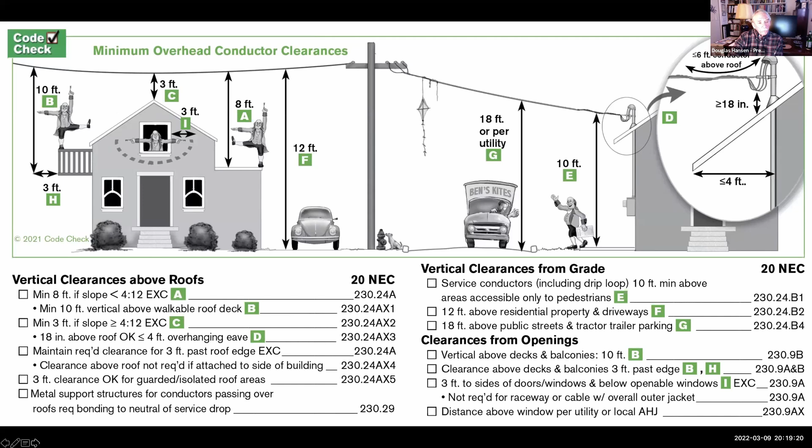But we find this as a good guideline nonetheless for certain things that affect safety and are common sense in a way, especially this one on the left about the distance to an openable window. We don't want somebody being able to reach outside their window and use the electrical service wires as a clothesline.

So here's an example from a house that, gosh, I think I probably looked at this 40 years ago. You can see what happened here is someone built an addition on the back, right underneath the existing service drop. So what you have is something that's a potential hazard to people working on that roof, or even a firefighter walking across it. It's just an example where I'd use the illustration and point out that that's not allowed to be so low over that roof.

Basically, the rule for clearance in front of a piece of electrical equipment that might require servicing is, can I put a refrigerator in that space? That is a space that's 30 inches wide and 3 feet deep. This box does not necessarily have to be centered in front of that panel, but it has to have those dimensions - at least 30 inches of width and 3 feet of depth.

And for the last 30 years, the codes have also said that working space extends all the way to the floor. Didn't used to. It used to be that you could have some permanent piece of equipment like a clothes washer even in front of it, but not anymore.

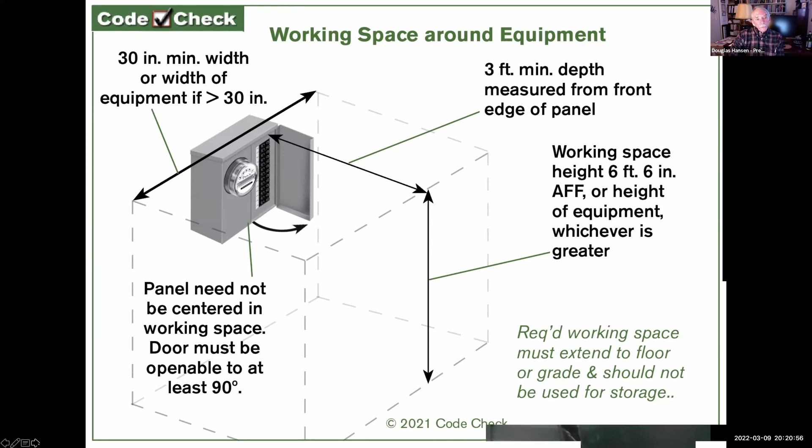There's a requirement, and a lot of confusion too about how to do this right, for feeders that supply separate detached buildings. Today we basically always provide a 4-conductor feeder and treat this like a sub-panel, meaning we don't bond the neutral - we have a separate equipment ground and a separate neutral. But the difference is that whenever it's more than one circuit in this separate structure, it requires its own grounding electrode system. That grounding electrode system is there for the same reasons we have one at our house, which is primarily to prevent voltage gradients from affecting our systems.

It's to protect us from lightning. It has nothing to do with helping our circuit breakers protect us when there's too much current going through the circuit. That is not the purpose of having a connection to the earth. The circuit breakers don't care about the small amount of current that could actually be traveling through the earth compared to the large amount of current that could be carried on an equipment ground.

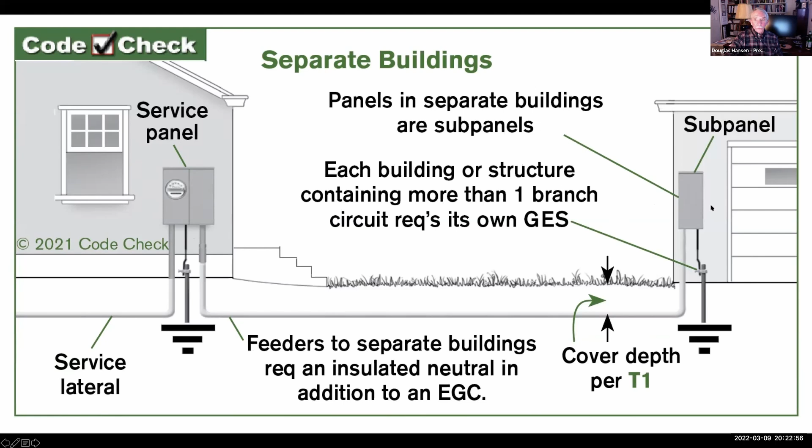So this has caused a lot of confusion to people. What happens is people think, well, all I have to do is connect to a ground rod at my second building, and I don't need to have the equipment grounding conductor in the feeder. Well, yes, you do. And you keep your neutral free of it.

So here's an example - I see this wrong a lot. I just did a report, matter of fact, on a $5 million new construction where the main service came into the garage, and the main house had 2 sub panels, neither of which had any kind of apparent separate grounding system.

There's one question here from the great state of Florida. Mr. Larry Serra wants to know if sub-panel clearances take into consideration a garage where the car would be parked.

There isn't anything, as far as I know, in terms of a concern, unless the vehicle could hit the sub panel, in which case it would require some kind of a barrier. But no, you can move the car, you can move anything that you've set in front of it. It's only things that are permanently a part of the structure, such as a workbench in front of the panel, that would restrict the clear space to the floor.

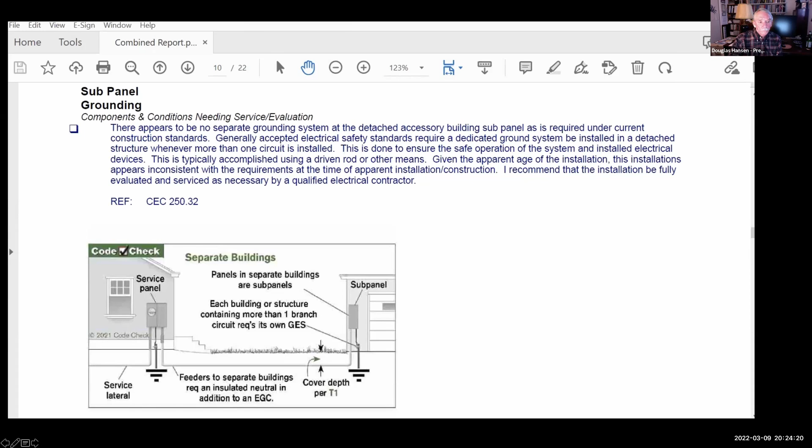This illustration is showing all of the different materials that are used as part of a grounding electrode system. We've got our ground ring shown, building steel, the concrete encased electrodes—these are very common on the West Coast—metal underground water piping, and, if all else fails, driven rods. The basic idea here is that you use everything available to you as a means of connecting your electrical service to the earth, and you can use the water piping as a means of bonding those things, but only within the first five feet of where it enters the building, because after that we don't necessarily trust it to be electrically continuous.

This illustration also gives us some of the minimum sizes based on the size of the service conductors. By the way, this table in the code is one of my pet peeves. It showed up in the 1934 NEC—no one remembers where it came from or why—but the basic idea is that the larger your service conductors are, the larger your grounding electrode conductor has to be, on the theory that you're going to have a greater magnitude of current, essentially for lightning protection. But there aren't any studies that actually justify it.

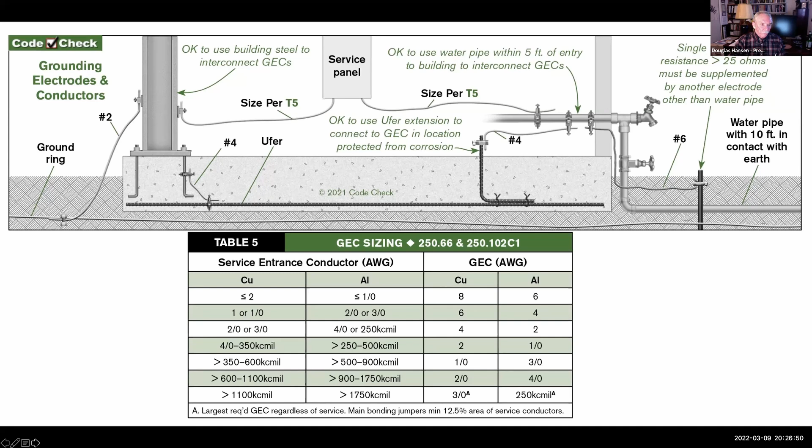And if you don't have any of these other things—no building steel, no concrete encased electrode, no ground ring, no metal underground water piping—but you have a 600 amp service, all you need is a ground rod, and the conductor to it never has to be any larger than a number 6. So there's a lot of contradictions to this. It's one of those confounding things in the electrical code.

Questions? Yes. First one is: what is the value of citing building codes, even by implication, for the purpose of helping a buyer complete a purchase of a home in a jurisdiction that has not adopted the referenced building code, when the modifications could be recommended without reference to building code?

Skip, that's a report writing question. How do you deal with that?

Sorry, I was muted. I saw that and thought that's probably for me. I choose to sometimes put code references in my reports. I do not recommend other people do it, simply because I know what codes are adopted here and a lot of the local stuff. And it's not for the buyer—I do it so that when the contractor whines and says 'well, that's the way we do it here,' I just point to the number and say look it up and have a nice day. For me it's dropped the number of stupid calls from contractors radically. I never put the citation in, just the number, because they're supposed to have a copy in California. So anyway, that's my personal twist on it, not suggesting you guys do it at all.

Thank you for that, and I would think there's also safety issues involved. The other question is, when there is more than one circuit and a GES is required for the garage subpanel, does the ground screw stay installed or does it get removed?

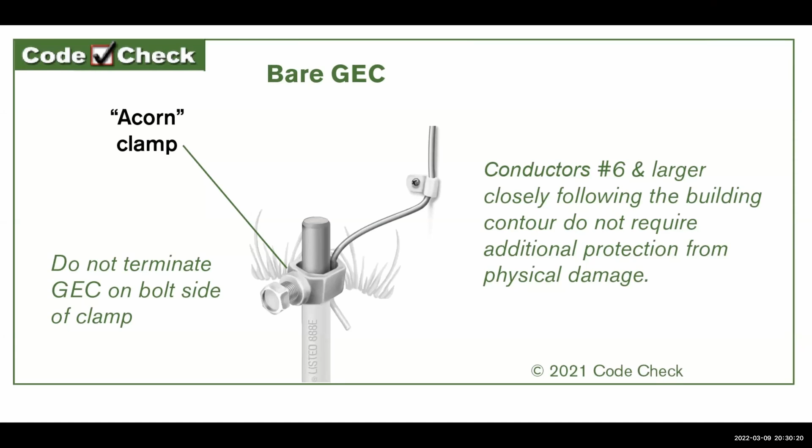There are a few other detail illustrations in here about grounding electrodes and their connections. One of the things we see is shown here: a conductor that's a number 6, which is only one size larger than the minimum you could ever have, which is number 8, can travel on the surface of a building and be considered not to require any additional protection.

But sometimes you'll find that, especially if the rod isn't driven in all the way, if it's something somebody could step on and break, I would point that out.

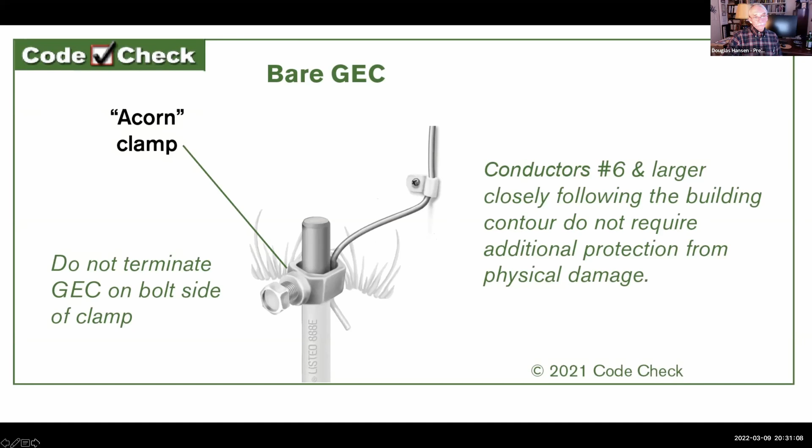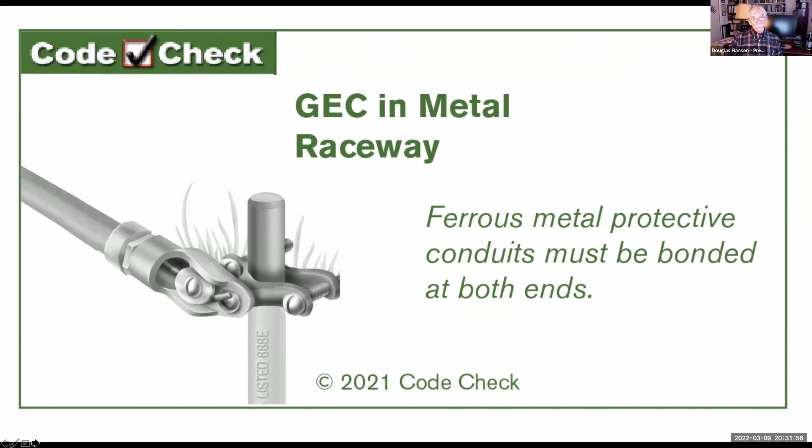What also happens is a lot of times you'll see that the conductor is protected by a metal conduit. And if it is a metal conduit, then in the event of current being carried on that conductor, as a result of induction, that current into the conduit will carry most of the current, not the wire. Therefore, the conduit has to be bonded at both ends, bonded at the panel and bonded at the grounding electrode connection. So here's an example of one that is not bonded.

In the Loma Prieta earthquake, we saw a main bonding jumper in the service equipment for the county building in Alameda County. That was a 750 kcmil conductor that burned through from exactly this condition, because it was a massive immediate fault when that happened from the air conditioning flying off the roof.

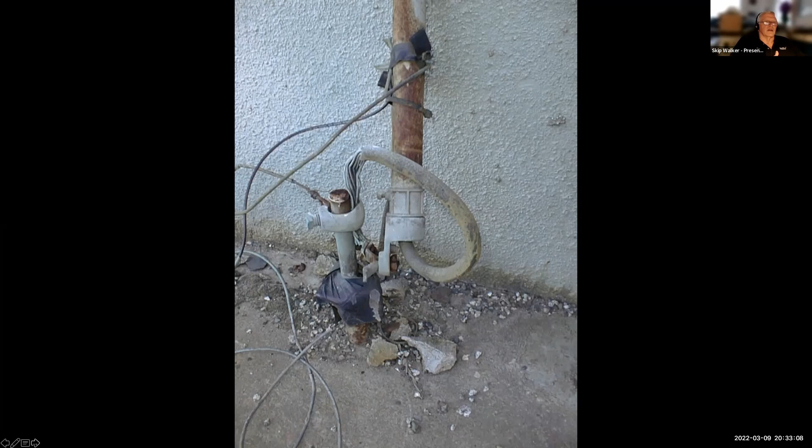Douglas? Yes. There was one person that said, could you repeat the discussion we had in the previous group about code check illustrations and how that's a name and not an implication of code?

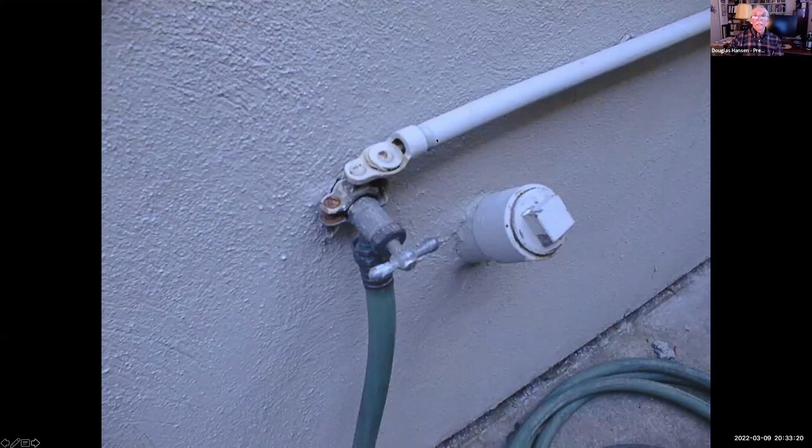Yes. Oh, let me finish this one here first, because we've got an example of it done right. This is what you should see: that if it's got a metal conduit, the metal conduit is bonded to that, not like this.

But back to that other question. The code check illustrations, as I said before, are trying to show what code requirements are. The code requirements by themselves are fairly dry things, but how those codes come about is as a result of experience that's usually been learned the hard way. There are safety questions behind all of these things, and we feel very passionately about some of these things ourselves. So when we're writing code check, we're trying to think to ourselves, what can we put in here that will really drive home a point that makes a difference to people? The current set of code check illustrations, there's a little over 300 of them. We're only talking tonight about less than a fourth of those because of the amount of time we have. But what we're trying to do is help show the ones that have to do with safety and performance of a building that we think are the more critical ones.

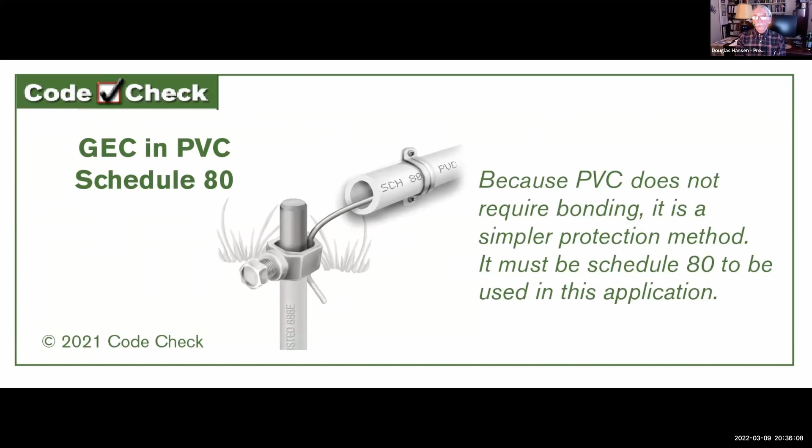So back to grounding electrodes, you can see that PVC Schedule 80 is a much easier way to protect these wires because you don't have to worry about the bonding, and it's actually stronger than EMT.

Let's continue on. I hope that you guys are seeing these intersystem bonding terminations.

First off, in general, I'm curious, maybe Jim could answer for everyone. Do you usually find in your part of the country that the service disconnect for the building is inside or outside? Outside, it's on the outside. Oh, sorry, service disconnect - meters outside, disconnects at the panel, inside.

Yes, right. So when you guys adopt the 2020 National Electrical Code, you're going to have a real issue there, because it requires that there be an emergency disconnect on the outside, which is essentially the service equipment typically, although it could be a shunt trip or something else.

But what also happens is that service equipment, where that disconnect is the furthest downstream point, is where you can have your grounding electrode conductor originating. It could originate from your meter, or from your service drop. I think Larry Serro is on the call - he could tell us how they do it in Florida. I'll bet that in Florida, Larry, most of the time the grounding electrode conductor originates from the meter?

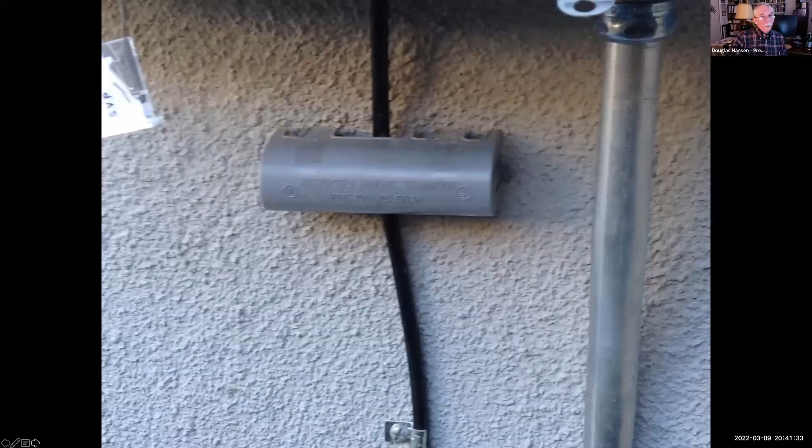So here's an example of what one might look like on the outside of a building. Take the cover off of it, it looks like that. And you've got to have at least 3 other empty ports for putting in cable TV, maybe satellite dish, maybe telephone - they used to have telephones, used to be with wires.

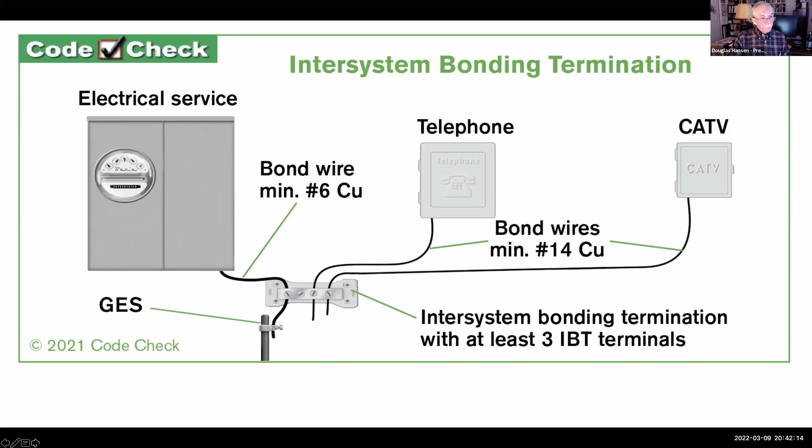When we first did this illustration, we also showed connecting the CSST bond to it, and the response was immediate from the people on code making panel 5 to say, no, it's not for the CSST, it's for these other electrical systems - keep your CSST off of this.

So they also make this nice protective conduit fitting - we've got our grounding electrode conductor inside there, and then 6 little terminals for it. It's a nice way to do it, I think. I like this.

Question - do the surge protectors that attach to a 240 volt breaker really work? Yes.

I'm going to make the screen go blank for a second here. So don't worry, this is not a technical glitch. Wait, it didn't go blank. Okay, never mind, it is a technical glitch.

In the 2020 NEC, there is a requirement that every service have surge protection. The surge protection device can be ahead of the main breaker, or at the panel that has the main breaker. It can't be more than 30 feet downstream from it, and it has to protect the whole electrical system.

Now, a surge protective device, as compared to a surge arrestor, is something that's intended to handle a voltage up to 1,000 volts of surge. But what you also have in these devices is they're built to a standard that can interrupt a very high current and a high frequency current that is within those voltage ranges.

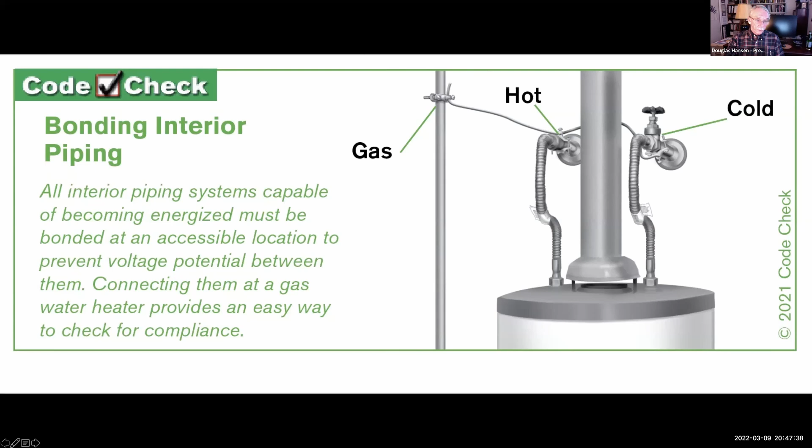So here's an example of using that illustration in a report. Yes. Question? And I don't know what part of the country this is coming from.

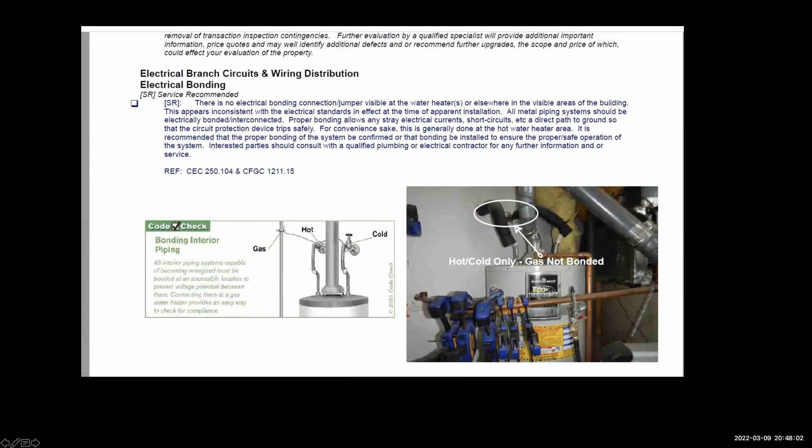We are seeing new construction with an emergency, I guess, service disconnect at the meter, and the neutrals and grounds are still bonded or together at the main service panel.

Well, again, this is a 2020 NEC requirement. It's a requirement that you have this emergency disconnect on the exterior of the building. One of the things it can be is a meter disconnect, and it has to be a true meter disconnect, not a meter bypass, but a disconnect.

If that's the case, from that disconnect to the electrical service, there won't be a separate equipment grounding conductor. It'll still just be 3 conductors going there, the 2 hots and the neutral coming from that meter disconnect. So the meter disconnect is one means of having the emergency disconnect. Your service panel being on the exterior with a disconnect is another way to do it. And a third way is to have a shunt trip button.

I think that's what they're seeing, but I don't know who asked that question. I would love it if you could send me a picture of that, because I've never seen it, only read about it. The one picture I have, which IAEI used as an example, wasn't really a meter disconnect, it was a meter bypass switch. Great question, you could email us at CodeCheck, info@codecheck.com. We'd love to see a picture of that.

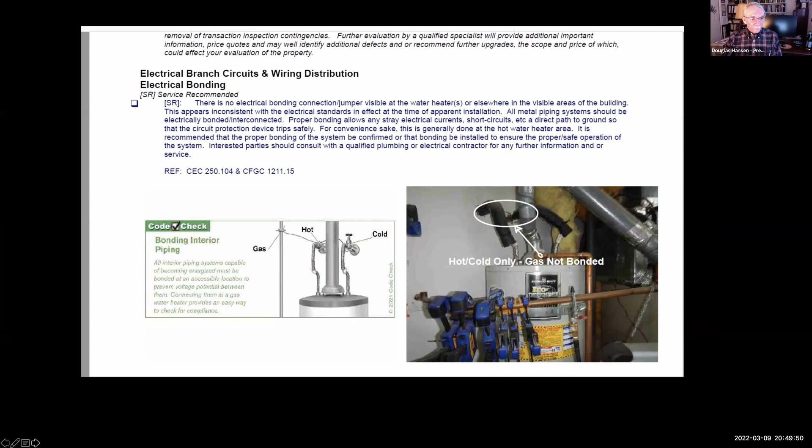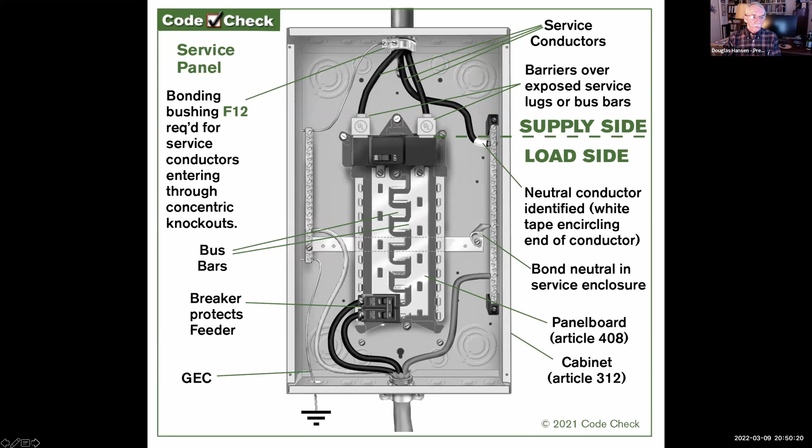All right, so back to the oldest question we always raise, of grounds and neutrals. Obviously we bond everything together at the service. We've only got our 3 conductors coming in. A fairly recent change is that we also put these little boots over the terminals at the service conductors. This gets a little further into what the 2020 NEC says, and we don't want to go into that as much tonight.

But I do want to look at the sub-panel picture, which this is probably something you find done incorrectly when you have a house with a sub-panel, probably 50% of the time or higher, I would imagine. It's a very common defect. So this illustration is very useful for explaining that you do not bond the neutral in the sub-panel, that the sub-panel requires the 4-wire feeder.

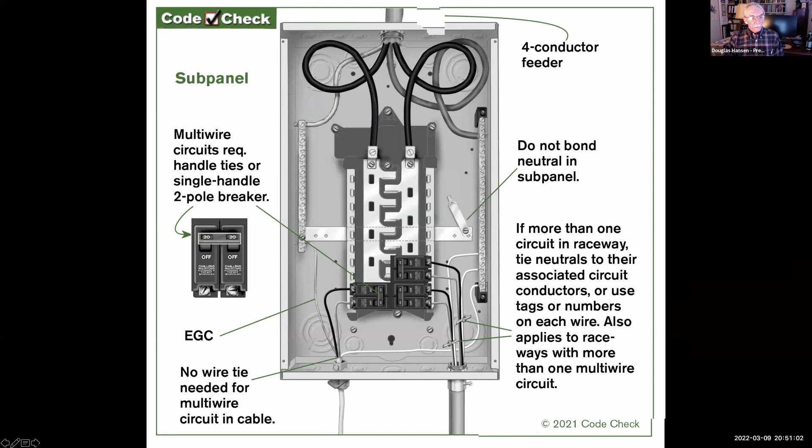And here we have an example of one done correctly. This is a nice piece of workmanship. Here we have our equipment grounds, and here we have our neutral. This is also one of those types of panels that has plug-on neutrals, so the GFCIs don't need pigtail wires.

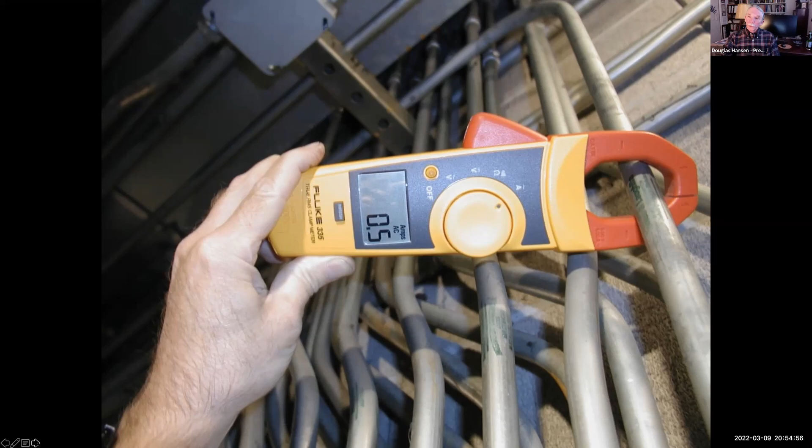The other thing I would expect to happen in a building like this is there would be a lot of magnetic fields as a result of these currents. You'd get interference with clear audio reproduction and possibly even with other electronic equipment.

There are a few recent changes in these codes. One is that the requirement for wall receptacles does not apply to places where there will be a full height cabinet that takes up that entire wall. If those cabinets have countertops, then the rule does apply that we don't want any part of that wall further than 6 feet away from a receptacle outlet, which means if I go 6 feet away from that one, I've got to be within 6 feet of the next one. It gives us a 12-foot spacing, something that's been in the code for 60 years or longer.

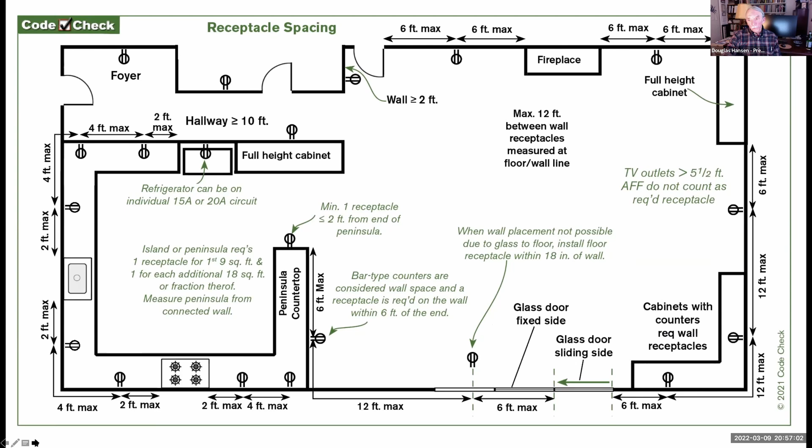So we've had a few recent changes on peninsulas and islands. We'll get to a couple of other pictures that show that in more detail. But basically, when you're looking at a kitchen or any room that doesn't have the required number of receptacles, this is a good illustration to support where you think they should be. And here's another illustration just showing that 6 foot, 12-foot rule.

For islands and peninsulas, we have a problem when there's a countertop surface all the way across, it's not as convenient as with a wall where you just have the receptacle in a wall to serve that countertop. What happens here is we have two competing safety factors. One factor is that we don't want people to have to use extension cords, because if they use extension cords, they're going to be draped across the sink or the stove, or people are going to trip on them, etc. So we want to have receptacle outlets where appliances are going to be used.

But if we have receptacle outlets on the side of a cabinet like this, what can happen is you plug something into it. Say imagine we have a crock pot or frying pan sitting up here on top, and a little kid walks by, they can grab that cord, pull that appliance down onto themselves, and have all kinds of bad things happen. So on the one hand, we want receptacles to serve this island. On the other hand, we are wanting not to have receptacles there.

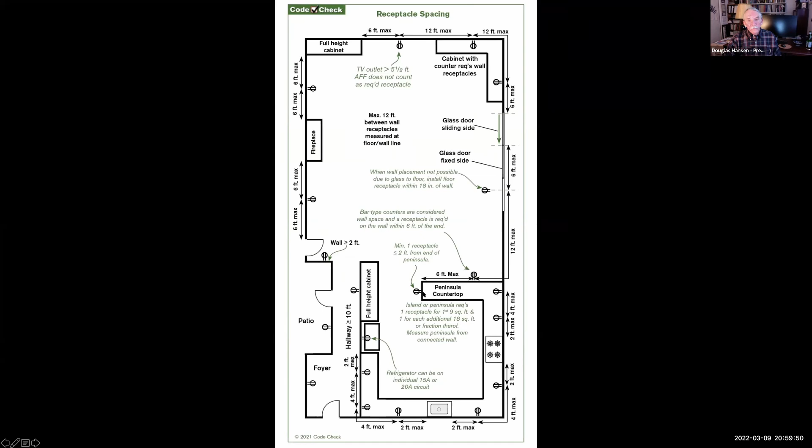And if we go back and look at this peninsula here, in the 2017 code, the outlet on the wall over here would be the only one it would need. In the 2020 code, you have to have one within 2 feet from the end of the peninsula. But in the 2017 code, the one on the wall was all that was necessary. So I mentioned there's two competing safety factors, and it sounds like the thing that was really dominant in the 2017 code was the safety factor about the danger to children from having these receptacles. Well, the 2020 code went the other way completely.

So what it says is, oh no, we need a receptacle outlet for the first 9 square feet of that countertop, and then another one for each subsequent 18 square feet or fraction thereof. So if my island was, say, 4 feet by 7 feet, and I have friends who have kitchens with islands that big, that would be 28 square feet. So I'd need one for the first 9, one for the next 18. Oops, I'm over that by 1. Got to have a third one. Got to have at least 3 receptacle outlets. So that's what they did in the 2020 code.

In the 2023 code, they're going to go back the other way. And this has gone back and forth ever since they started paying attention to countertop receptacle outlets in the 1990 code. So we're going to see for 11 code cycles in a row that they have to change what they did the time before. This is really interesting, I think, for you as home inspectors.

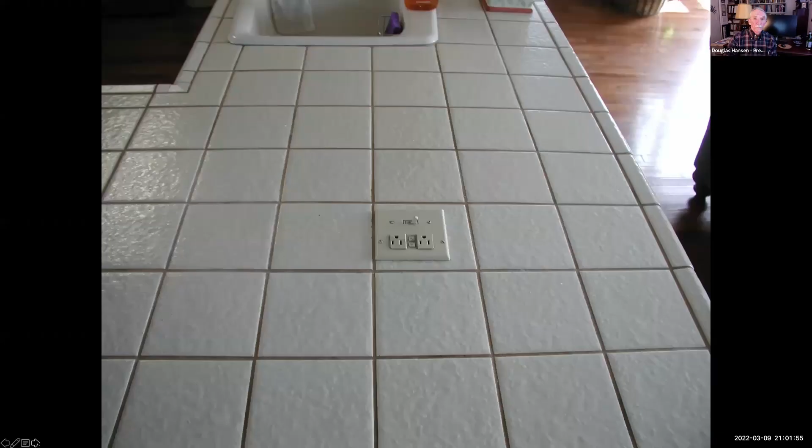This is not the solution. You can't put it face up in that countertop, for pretty obvious reasons of what's going to happen when you spill something on it.

Lights in closets are something that was only fairly recently regulated in the NEC, so we see a lot of older installations that are pretty concerning. But basically, there are several rules. The first rule is that you cannot have any type of bare, exposed incandescent fixture in a closet. If it's an incandescent fixture, it requires that it be completely enclosed so that nothing flammable can contact the bulb.

The next thing is that there are certain areas where you can't have light fixtures in your closet. The only time you're allowed to have them on the wall is if it's the wall over the doorway. The reason is, suppose you had a light fixture on the wall, you turned it on while getting dressed, took off your bathrobe, hung it on the light fixture, and forgot to turn off the light. A lot of our clothing, synthetic clothing especially, is highly flammable. So you've just put something flammable onto a source of ignition and waited for it to heat up.

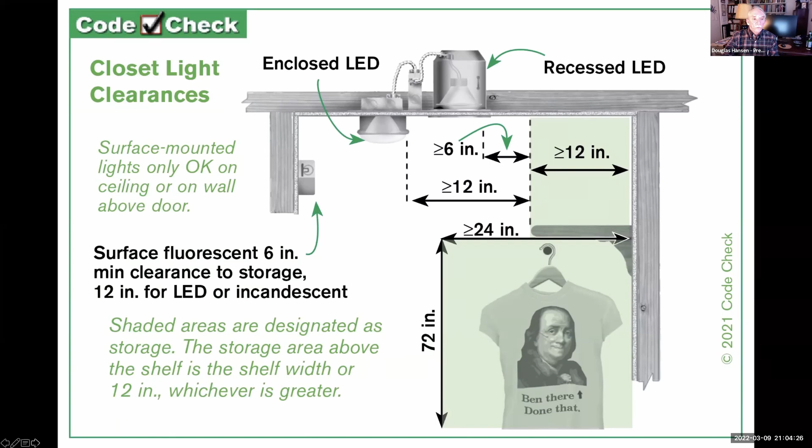So we see this all the time on older houses - something like this, a keyless light fixture right in the storage area. So it's not a question of just covering it; you're not allowed to have it in that spot at all. This is a fairly shallow closet, so they probably just should not have a light in there at all - it's a fire hazard.

Question? Yes - back to the kitchen a minute. Sure. Are the pop-up receptacles actually corded to allow the flexibility of the outlet, the movement?

Well, you've got a cylinder the same size as the one you saw up above on the top, down below it inside the cabinet, and there are internal cords rated for that moving up and down. What happens with these is when you close it down, it has a little flexible gasket that actually seals it so it's watertight. That's part of the UL standard for testing them - that they can't leak. As far as the wire you're bringing into it, that wire isn't going to keep moving around. It's going to be stationary where it connects to that thing. I hope that answered the question.

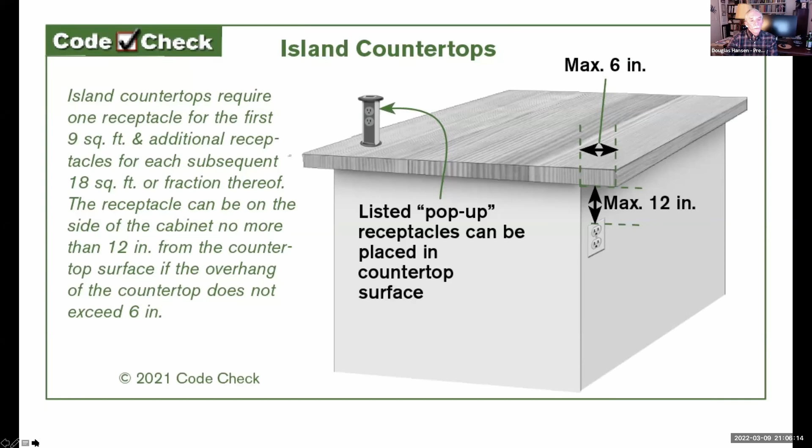I think it did - so all the moving wire is inside the unit? Right. A lot of different people make these. The first people to have made it were Thomas and Betts. It's a great idea - only problem is they're expensive.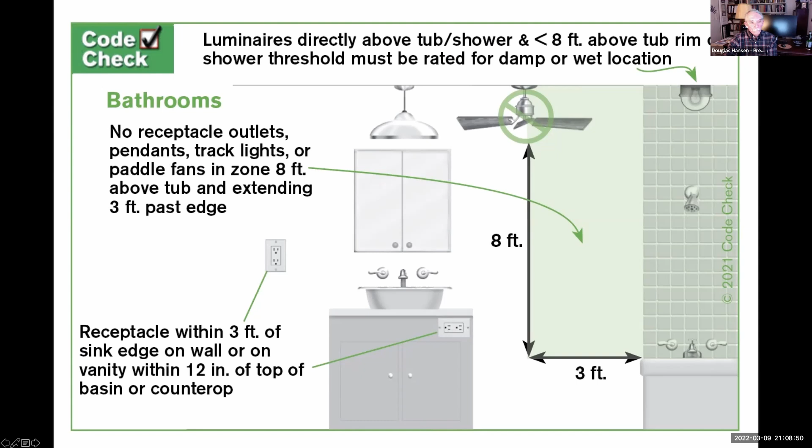So here's an example of using that illustration, and it's the older version where I see it says no fan, it doesn't say no receptacles. It's calling out this pendant fixture hanging down less than 8 feet above the top rim of this tub.

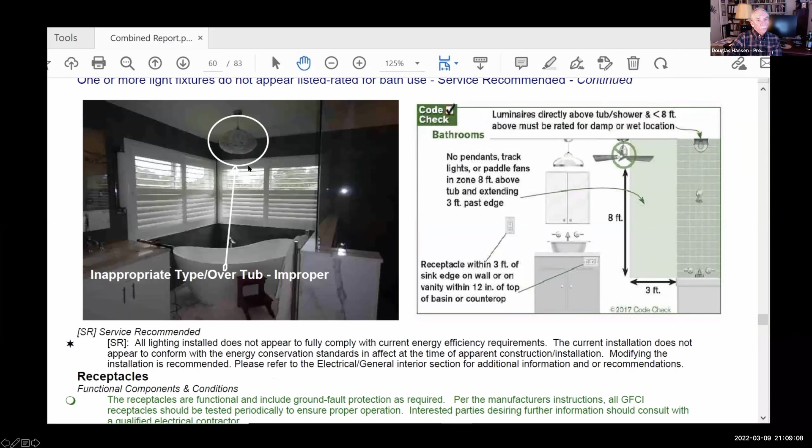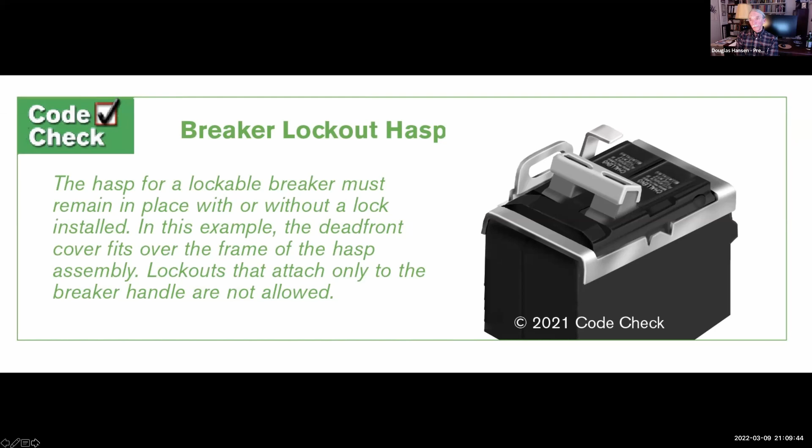There are certain situations where you'll need a lockout hasp on a breaker. The most common would be an electric water heater with no disconnect within sight. Back at the panel, you use a lockout hasp to turn off the breaker, put a padlock on it, and work on the water heater without worrying about someone turning the power back on while you're working.

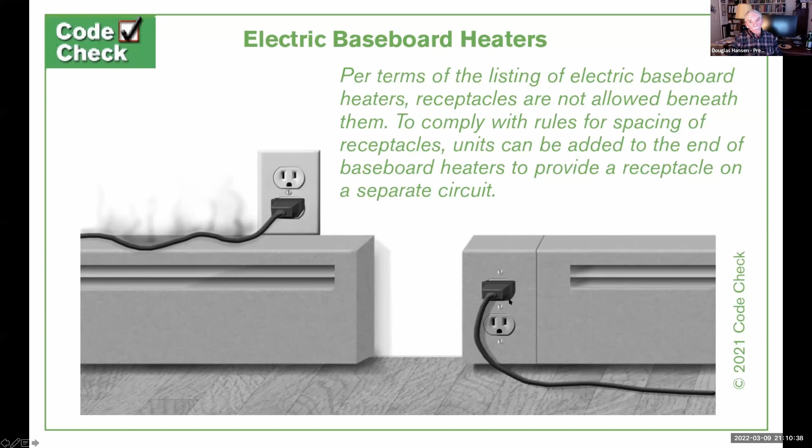Electric baseboard heaters very often have this problem of receptacle outlets installed directly above them. If you look at the listing instructions that come with them, they almost always say you cannot install these beneath an electrical outlet. For some baseboard heaters, they make add-on extensions where you could have a receptacle outlet built into that space to meet your wall space receptacle requirement, but it can't be on the same circuit as the heater. Here's an example of what we're talking about - you see that cord is going to get fried sitting there. And here's an example of one with a receptacle outlet built into it.

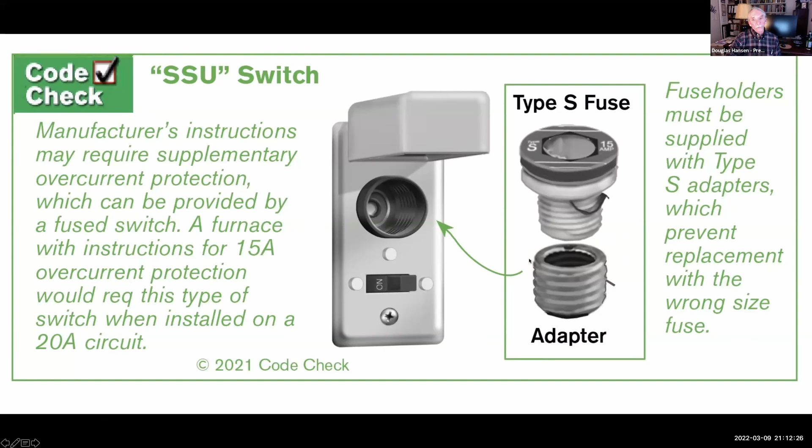What you do is use an SSU switch with a fuse in it where you can put in a 15 amp fuse. But you can't just put in any 15 amp fuse - any new fuse has to be a type S fuse, meaning it has to have an adapter and a set of threads unique to that adapter so you can't put in an oversized fuse.

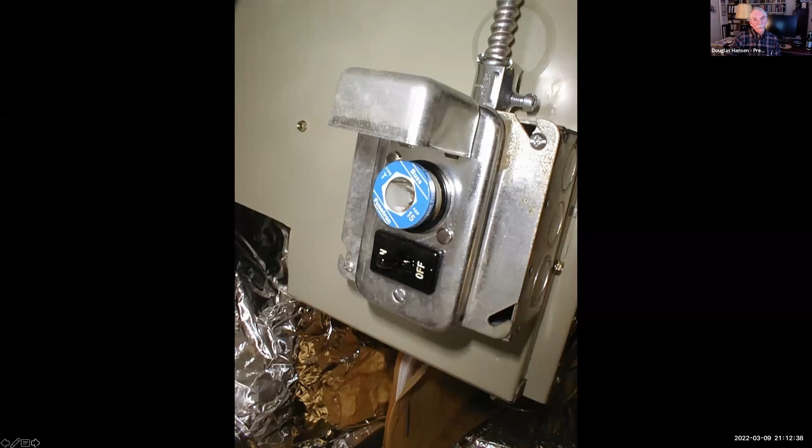So here are some examples. Here's an SSU switch with its fuse in it, but that's actually the wrong kind of fuse - it should have been a type S fuse with a type S fuse adapter. This is a 15 amp adapter, and somebody tried to put a 20 amp fuse in it, and it won't fit. It's a different thread configuration so it prevents it from ever seating and prevents overfusing. So you shouldn't use an ordinary fuse, it should always be a type S fuse.

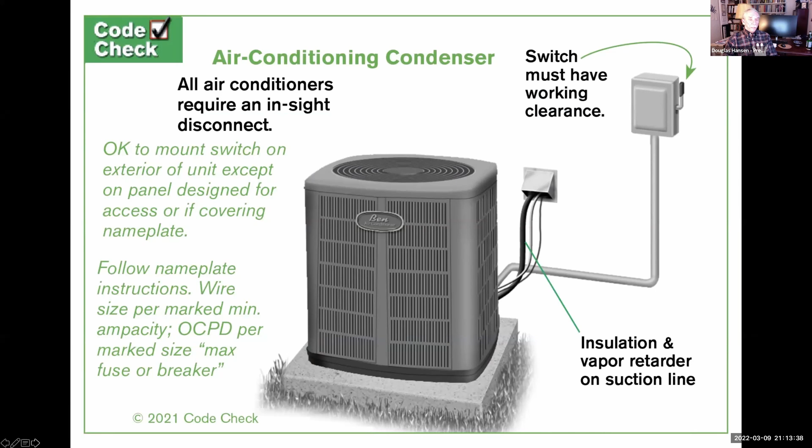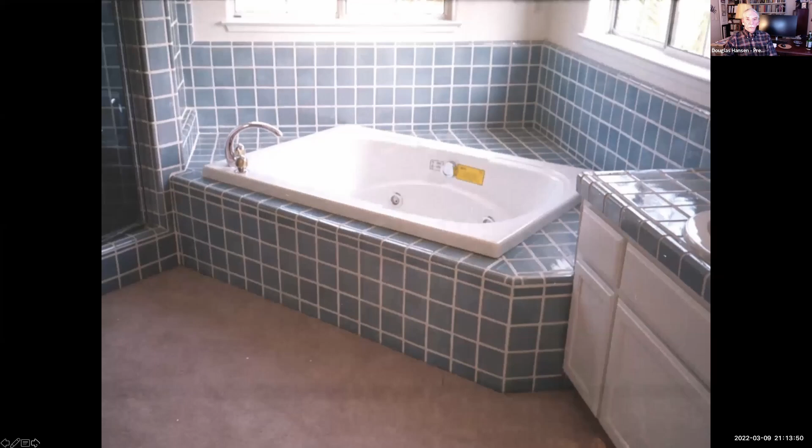More appliance issues - for air conditioning condensers... oh wait, we didn't get to plumbing, did we? Oh my God, I'm really sorry. I've been timing this to end at 9:30 and I forgot plumbing altogether. Let's jump ahead a little bit here. Oh my goodness, I get carried away on this. I'm really sorry, I've just been babbling here.

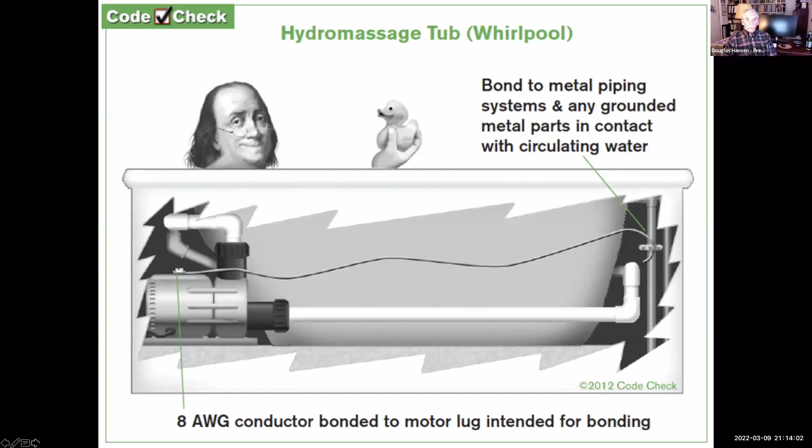Okay, well, we're going to get to plumbing. Well, Douglas, we're enjoying your presentation, but a couple of us have children to put to bed and things, so yeah, if you can. Yeah, well, I promised Hollis we would end at 9:30.

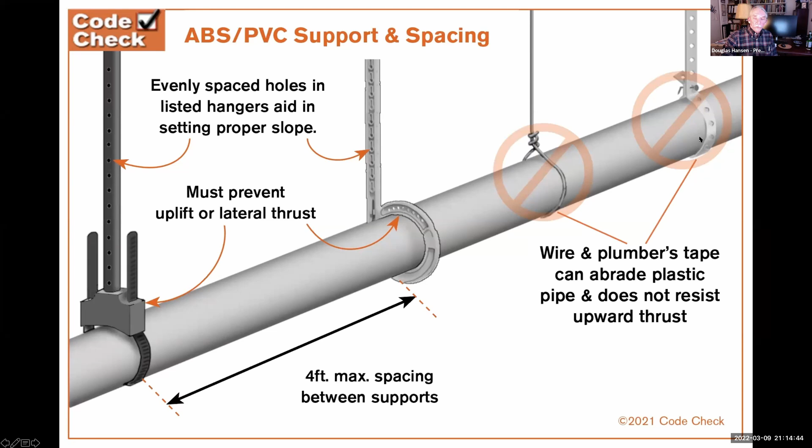So, okay, plumbing. Jim assures me that you guys actually do have some ABS out there in older houses, and it's not all PVC. This is a nice example of the right way to support ABS plumbing. And here are some examples of the wrong way, where the plumbing can actually move just with changes in temperature and abrade itself on these types of hangers. Also, these don't resist upward thrust of the pipe or hold it in a secure place.

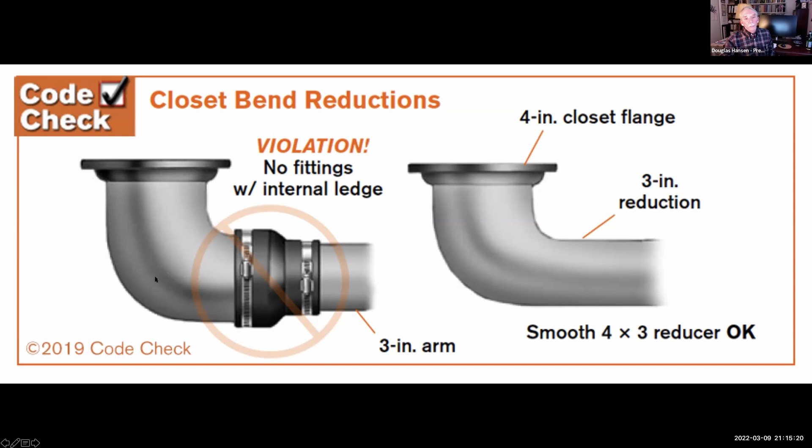Here we see the wrong way and the right way to have a reduction in size in a drain pipe. In general, no drain pipe can be reduced in size as it goes further downstream. They can only get larger. But there is one situation, which is that you could have a 4x3 closet flange, and that would be allowed. You can't do it with one of these adapters.

Another example of how not to connect two different materials.

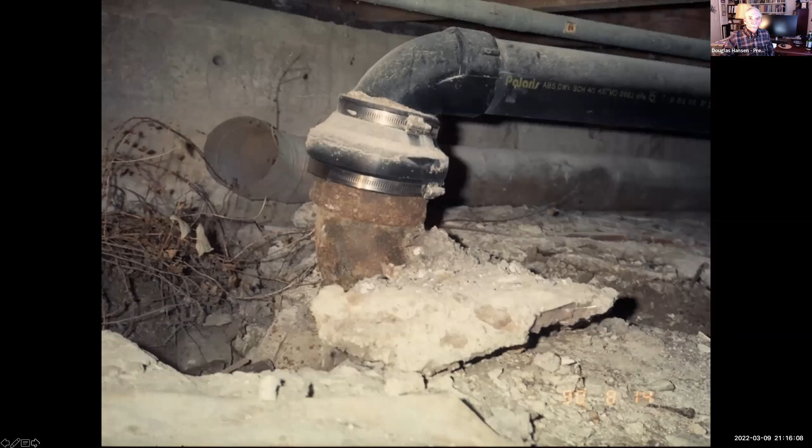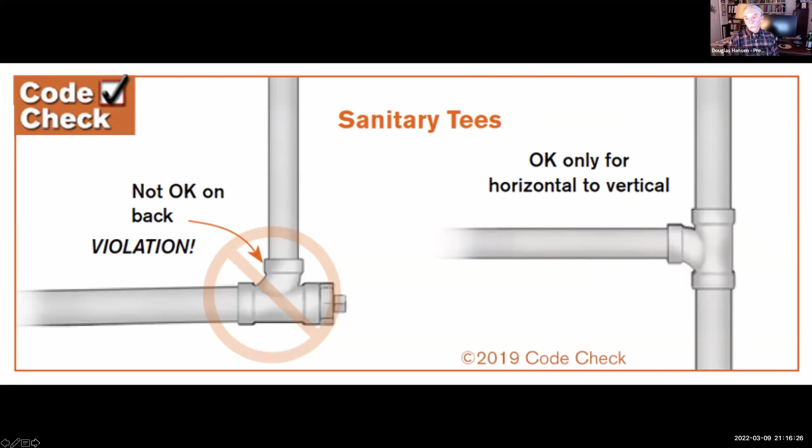One of the most common problems I find with plumbing is using the wrong type of fittings, the wrong application for fittings. A sanitary tee is designed only for horizontal to vertical configurations. So you'll see sanitary tees on their back or on their side quite often. Here we've got one on its back, and also we don't have enough room for that clean out to really be effective.

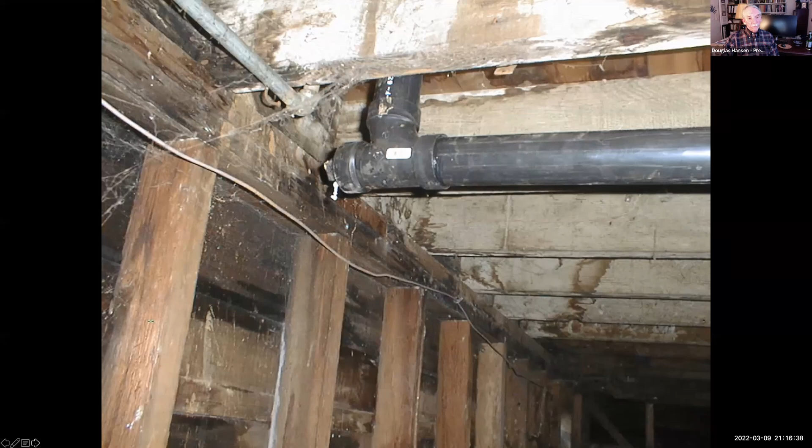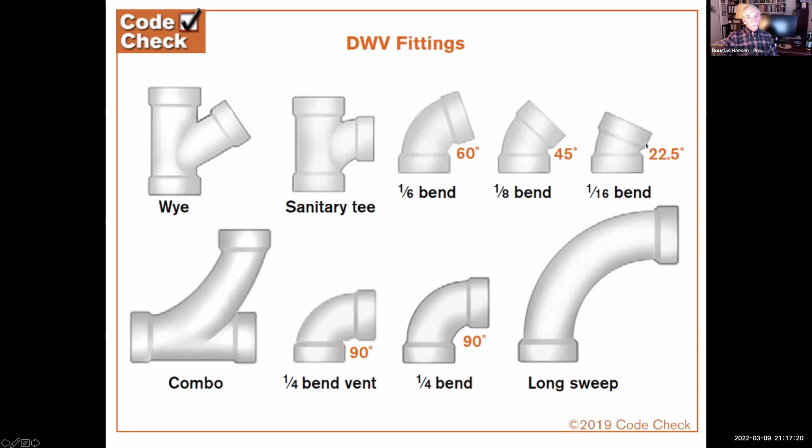So of these different fittings in our books, we listed a little chart of what each of these can be used for. Basically, when you go from vertical to horizontal, you're going from fast to slow, so you need something with greater sweep. When you're going horizontal to horizontal, you're going slow to slow, so you need something with greater sweep, although the IRC will allow these quarter bends for horizontal to horizontal down to 2-inch pipe. And when we're going from horizontal to vertical, we're going from slow to fast. That's the application for a sanitary T.

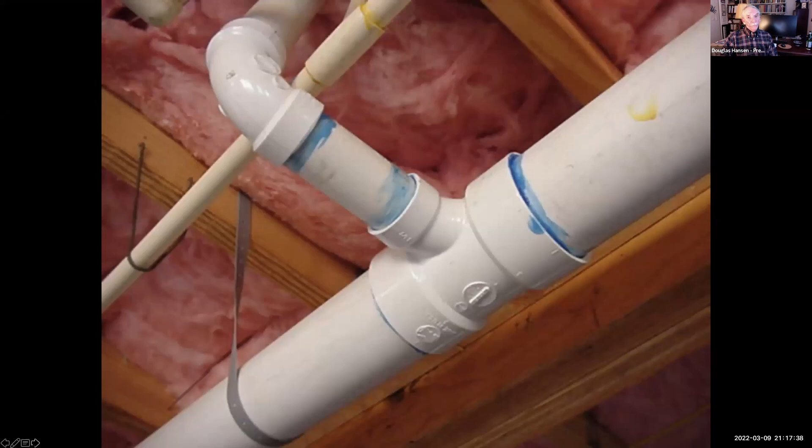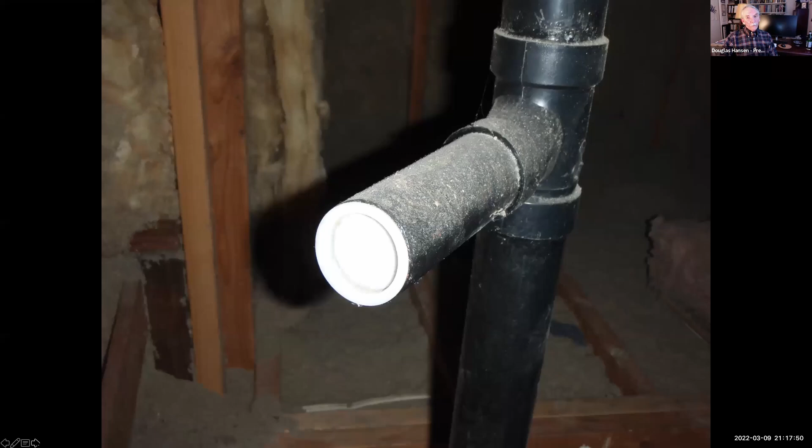So here we're seeing something that almost looked good, but we've got a sanitary T on its back again. Not the right way for that one in the middle there. Here's a sanitary T on its side. And here's a sanitary T that's upside down. If this was a vent arrangement, that actually would be correct, but it's not.

It was a waste arrangement. This is a very common problem, and it's almost impossible for you to see this after the wall is completed, but the problem here is that they've used a combo fitting instead of a sanitary T. So what happens is that the actual air inlet is below the level of the trap weir, and this will still result in siphonage. It basically means that the vent isn't going to be working properly. So this is where they should have used a sanitary T, and they didn't.

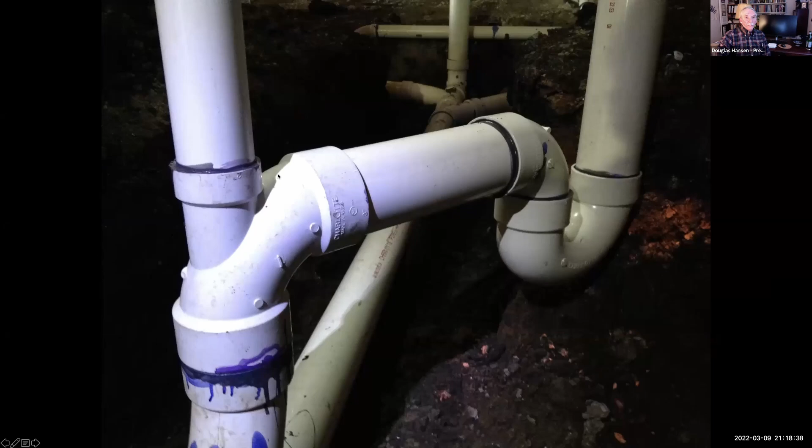Here they're using what's called a low heel takeoff. That is okay for that application. They're using it instead of a sanitary T.

Sewage ejector pumps, you probably do see these. Basically these illustrations are showing some of the details of what should be done on this and when they're required. This is required when the actual fixture is below the sewer. When the fixture is below the upstream manhole, we need a backwater valve. But when it's actually below the sewer, then we need something to lift it to get gravity on our side to get it to drain.

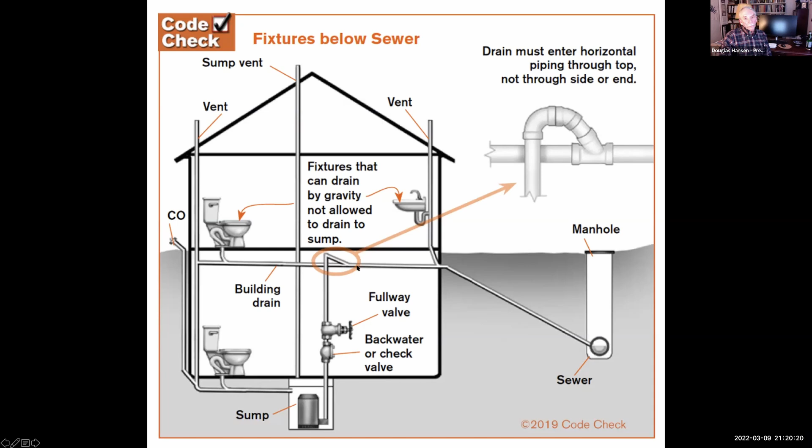So in this case, we're showing how the fixture below the sewer comes into this sump, goes through a backwater valve, and then a fullway valve to shut it off so that you can service it and clean it, and then enters into the plumbing system by coming into the top or the top half of this horizontal line. So what happens is that the sewage ejector pump is putting this under pressure here, and there's a little bit of a kick to it with each thrust of the pump. That kinetic energy has to be taken out of the piping system before it goes horizontal. So that's why this has to come in at the top there.

So there's a detail of it. Here's an example of one that's basically okay, although I would question whether ABS should be used as pressure piping in that application.

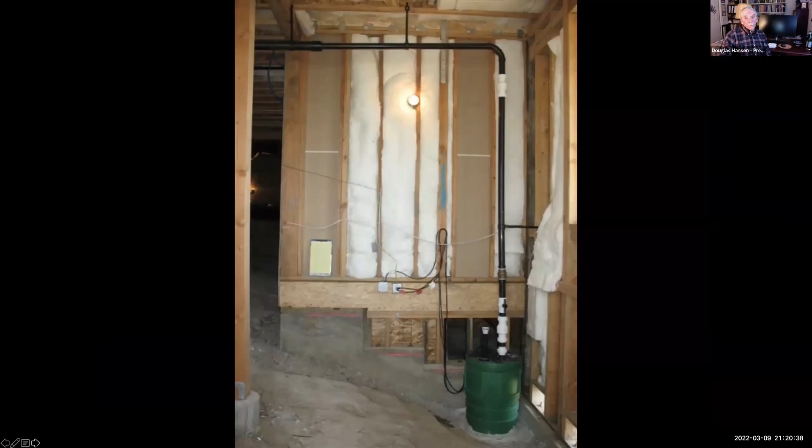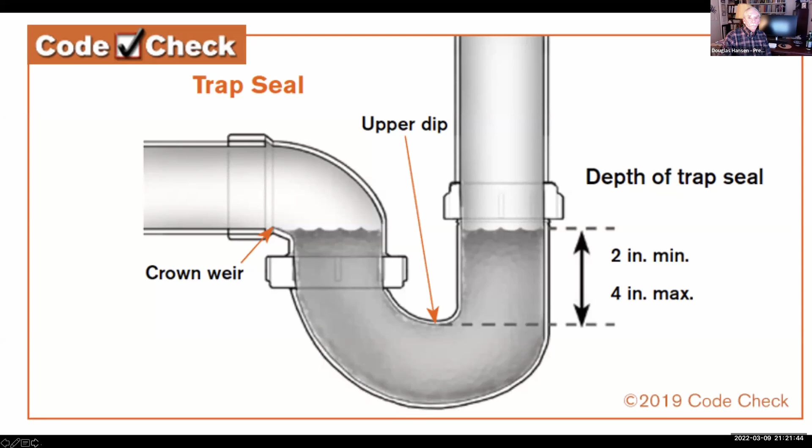Speaking of traps, we always get lots of interesting things on that. First, the trap seal should only be 2 inches to 4 inches. A deeper trap is more prone to sludge.

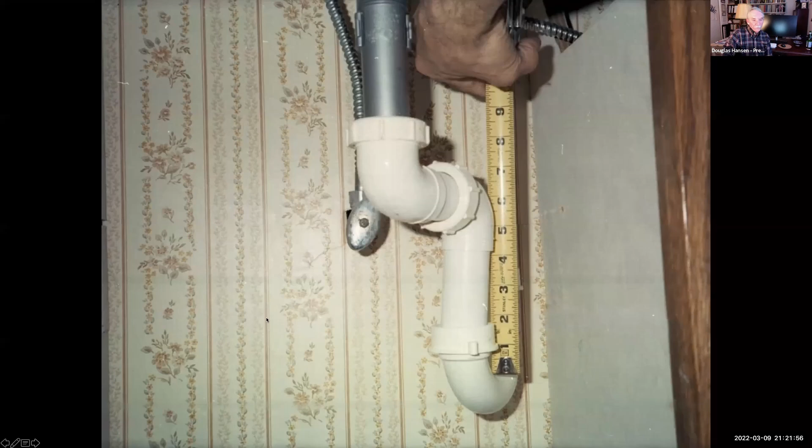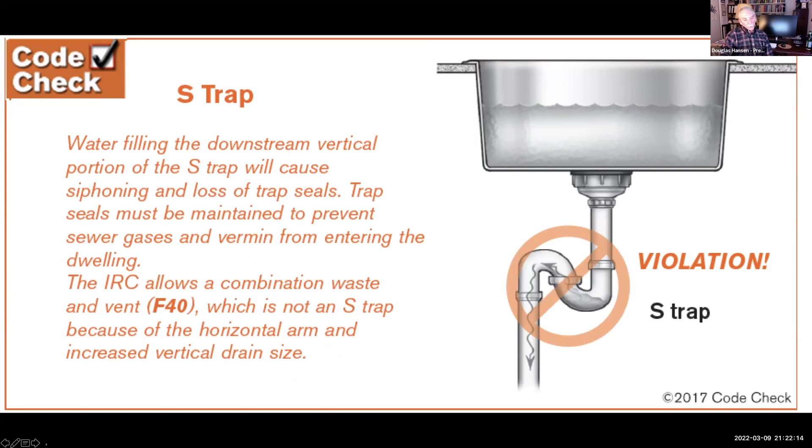We hear all about the horrors of S-traps. Basically the problem with an S-trap is siphonage, that the trap seal protects the air we're breathing from what's in our sewer system. Here we see a really old S-trap retrofitted probably on this plumbing system, but we also see a lot of them with really no excuse.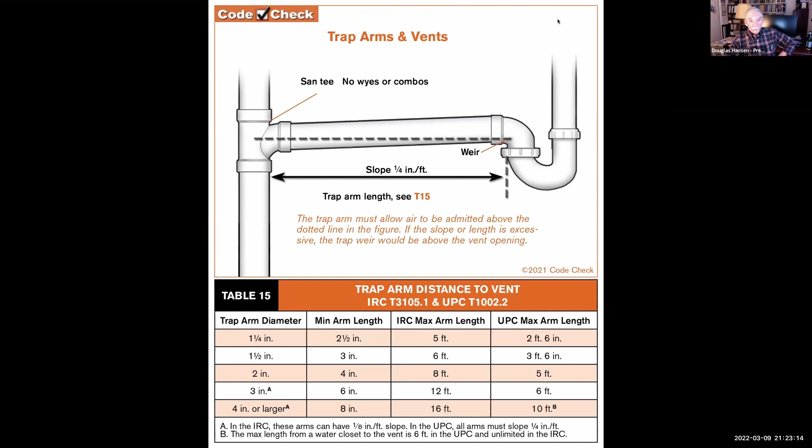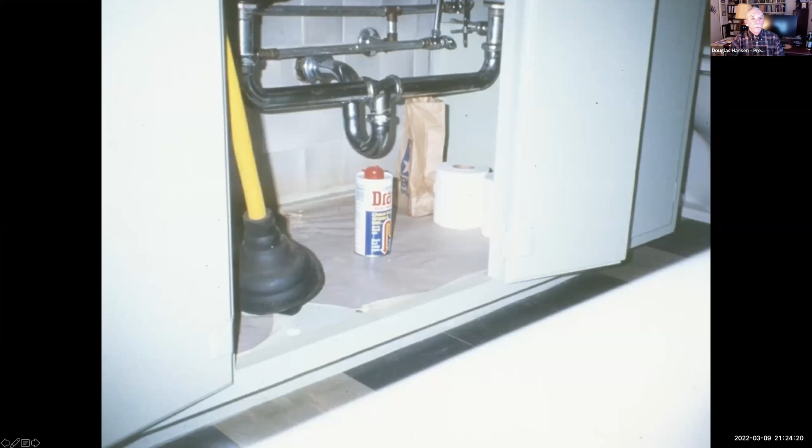This happens a lot in houses where they've done a kitchen remodel but haven't opened up the wall to redo the plumbing, because older kitchen sinks before garbage disposers would be very shallow and have a pretty high outlet for the trap. You need to lower that trap outlet down, which means taking off the wall when you remodel the kitchen. If they haven't done that, you end up with this problem.

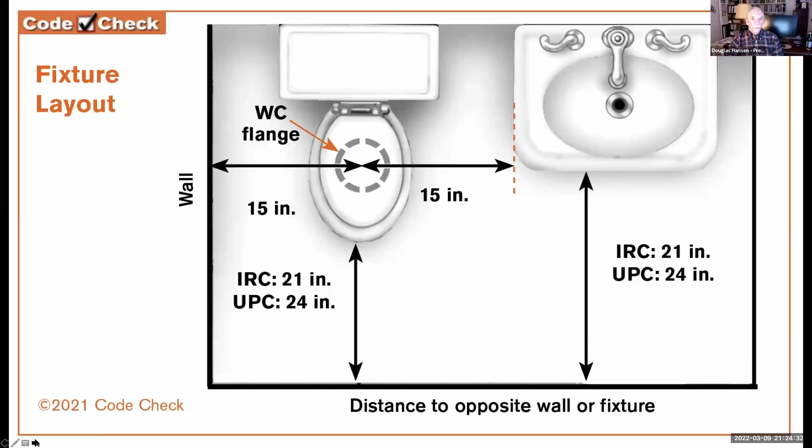Okay, I am very, very sorry that I took so long talking about electricity. I don't know why I like to talk about that so much, but I think I'm getting very short on time here. This is an example of...

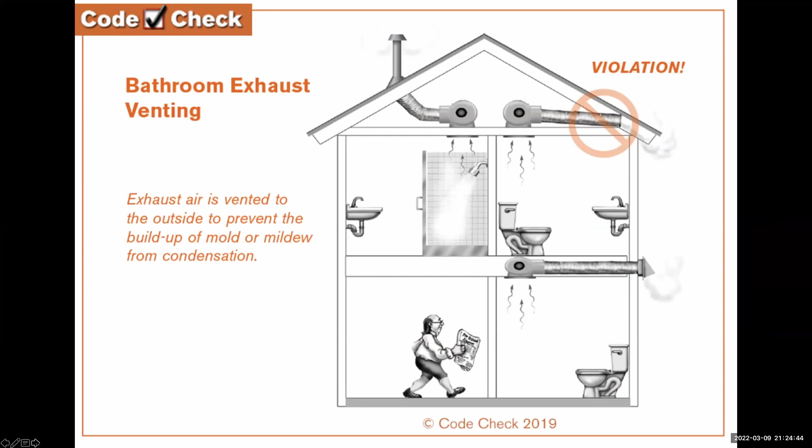Doug, you want to be sure to leave time to make your offer, and we got the drawing to do. That's true. Yes, yeah.

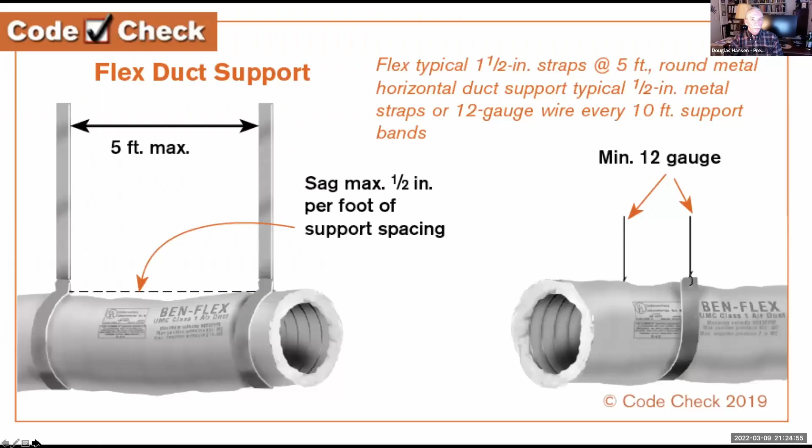Skip, why do they offer those kits? There was actually a big lawsuit. I met the attorney that was successful, and the glass on those direct vents can get up to almost 500 degrees. They literally had a 3-year-old child who was the injured party in the case, who required skin grafts on both hands because, and this is really disgusting, they had to peel him off of the glass.

So very serious, I think it was a $500 million award. The manufacturers of most of the major brands had to go back almost 10 years and offer retrofit kits for free. So my suggestion is take these seriously.

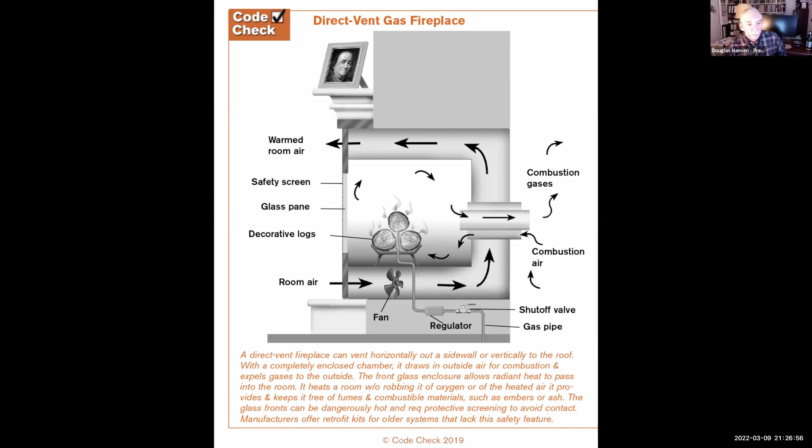Right, they also get installed improperly a lot. A buddy of mine, a colleague, Dale Febb, who's the best fireplace guy in the world, does a lot of forensic fire investigation stuff. He calls those, and I quote, a growth segment of his business, meaning they burn down a lot of houses.